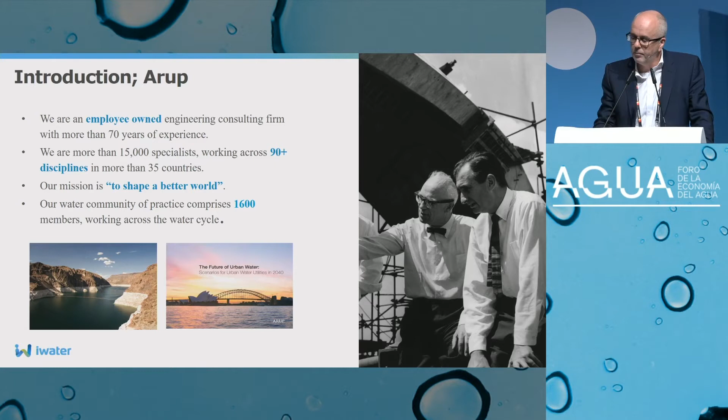And I just wanted to give a personal reflection. You just bear with me, but I think it's quite important. So back in March, I was fortunate enough to be at MIT in Boston. Within Arup, we run a master's class on urban resilience, and I was on that class. And we were being lectured by some very eminent urban planners and city designers as part of that course.

And as part of that, we were looking at the historic collapse of civilizations due to environmental constraints. And this really challenged me. So in Arizona, in the area where Phoenix now sits, back in 1300, the Hohokam had created this thriving populace of 80,000 people, a canal network over 500 miles, with over 100,000 acres of cropland. Between 1300 and 1400, that civilization collapsed.

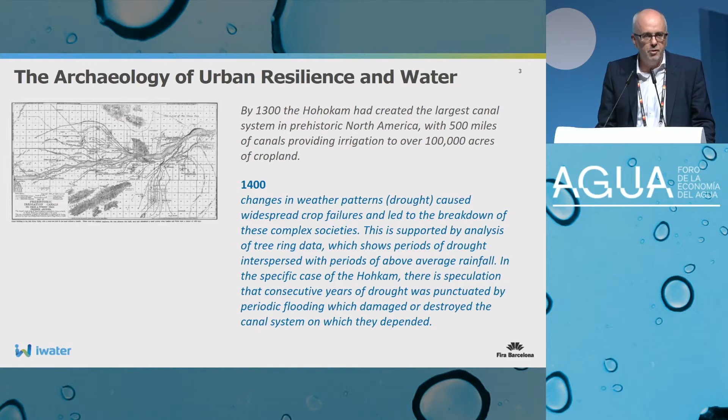And the archaeologists have looked at that in quite some detail, and that collapse they speculate is down to the presence of drought and intermittent flooding. So that was great, that was fascinating, I loved that. I went home and I logged on to the Guardian website, as I always do, and that's what I found. So some 700 years later, at the same location, we now have Phoenix struggling with water scarcity and some real issues around the sustainability of Phoenix as a city.

And for me, that brings up a number of thoughts. One, I think these challenges are real, and if our time frame's large enough, they are indeed very real. And two, I think compared to back in 1300, we have at least got some foresight of what we think may come. There may be some uncertainty around that, and I think it's incumbent upon us to act, to do so.

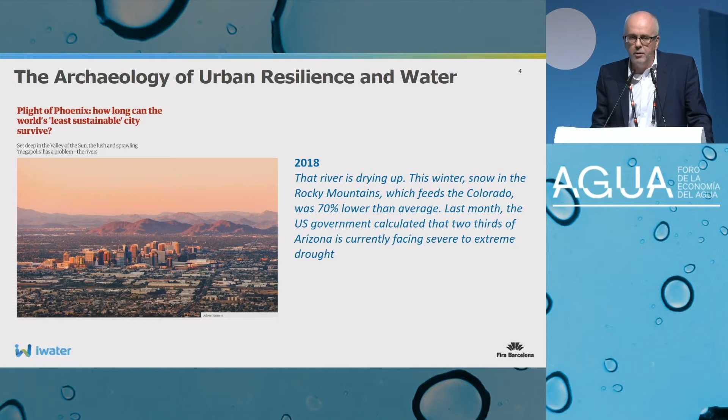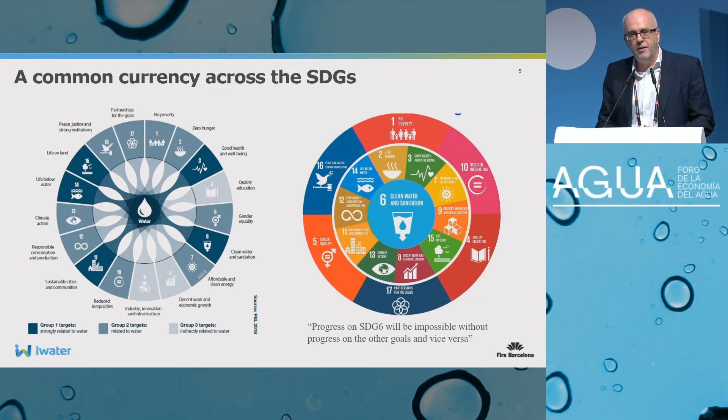And then if we look ahead to the future, I popped in earlier on and there was some discussion around whether water should be at the centre of the SDGs. I don't mind if it isn't, but fundamentally, if you read the synthesis report, it says progress on SDG 6 will be impossible without progress in the other goals and vice versa, so it can sit anywhere. And more importantly, I think that the high-level panel on water in their publication earlier this summer really drilled down to some of those key interlinkages. So if our future is the SDGs, we've got to understand water in that context.

So now I'm going to try something I haven't tried before. I'm going to take you through a publication we published this summer with the Ellen MacArthur Foundation on From Principles to Practices: First Steps Towards a Circular Built Environment. And that publication explores how a built environment will operate differently if we start to adopt circular principles. And Arup have tried to translate the circular economy principles that we often see in products and services into a built environment context. So that's great.

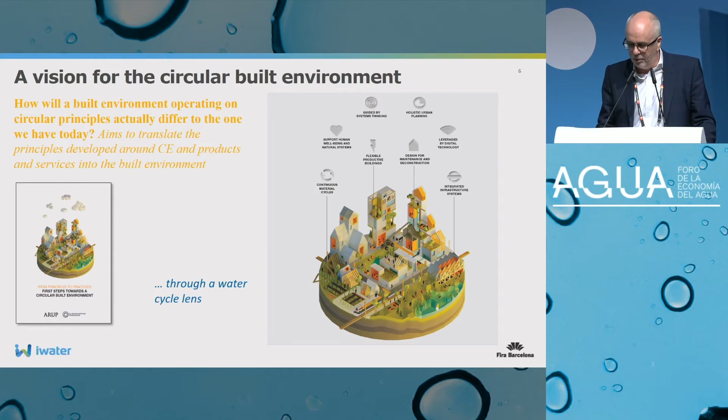What I'm going to try and do is then explore that through a water lens in terms of what water may mean to that circular built environment. So there are 8 key themes that come through that publication. So the first is supporting human well-being and natural systems. So when we start to think about water, we need to start to think about human-centered design, community engagement, co-creation.

Back in October last month, at the World Water Congress in Tokyo, we launched our Cities Alive publication, Water for People. That's the 5th in our series of publications, looking at global cities across the globe and understanding where blue interventions have made real impact. And there are a number of themes coming from that are shown here. And clearly, in terms of this first issue around supporting human well-being, putting people first is a key message coming from our review of cities.

In the bottom right-hand side there, you'll see a fairly complex diagram that hopefully you can read. So in the UK, we're working with Public Health England. We're starting to explore how can we get better health outcomes from infrastructure. So in the context of water, how can we get better health outcomes, whether it's from drainage and sanitation, whether it's from flood resilience projects, how can we get better health outcomes that benefit the city?

And we're starting off from the hypothesis that generally we start to think about health too late in our design process. So we're bringing, with Public Health England, health right into the forefront of our scheme and solution optioneering process and starting to think about shared assets and shared outcomes.

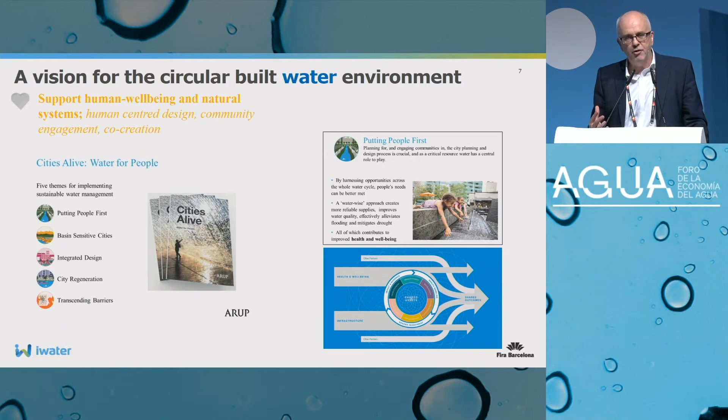That's work that's ongoing, but we're looking forward to working with health agencies in designing infrastructure. It's quite exciting. The second key theme is guided by a systems thinking approach, which we've already heard a lot of today.

And I want to use this prompt to talk about the work we've been doing with the Rockefeller Foundation, the Resilience Shift. So back in 2014, we set out with the Rockefeller Foundation to start to describe what city resilience looks like. What are the various characteristics of a city that might make one city more resilient than another? And on the back of that work, we developed the City Resilience Index, which is shown here, which started to tease out some of those key characteristics.

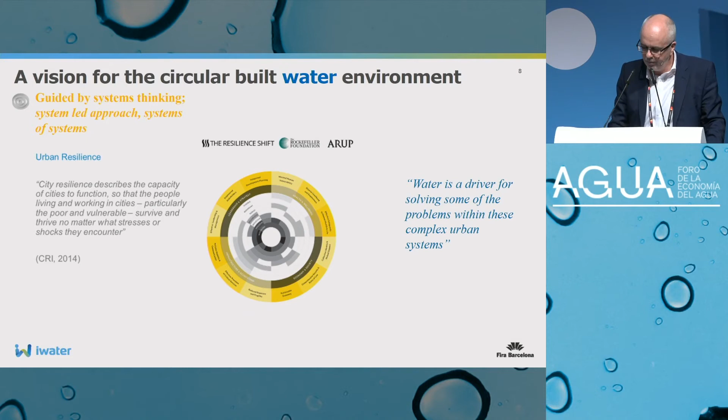The idea of these pilots is to go to the cities, do a deep dive around the water governance and management issues in those cities, and start to reframe that City Resilience Index into a city water resilience framework. So over the last 6 months, we've been working with Mexico City, with Miami, with Hull, with Amman and Cape Town, all of which have got some fairly key and significant water challenges.

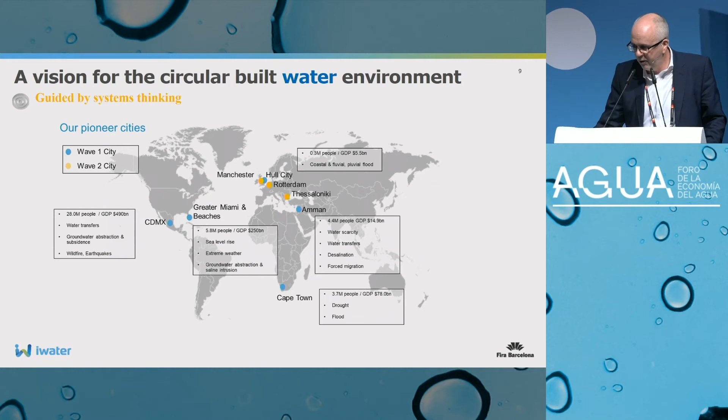If you listen to the representative from Miami speak, she talks about Miami being at sea level rise, subject to 15-foot storm surges, subject to flood inundation from inland flooding, and subject to saline ingress into their groundwater supplies. Some fairly major water problems they're trying to get to grips with. So that's been ongoing for the last 6 months. We've got some Wave 2 cities now that we're starting to work with.

And we've now started to take that thinking and build it into a city water resilience framework. It has links into the City Resilience Index, but it's subtly different in terms of understanding the role water plays around city resilience, looking at 4 dimensions: leadership and strategy, planning and finance, health and well-being, and infrastructure and ecosystems. And within those key dimensions, there are a number of goals. I can share more of this with you later if you're interested.

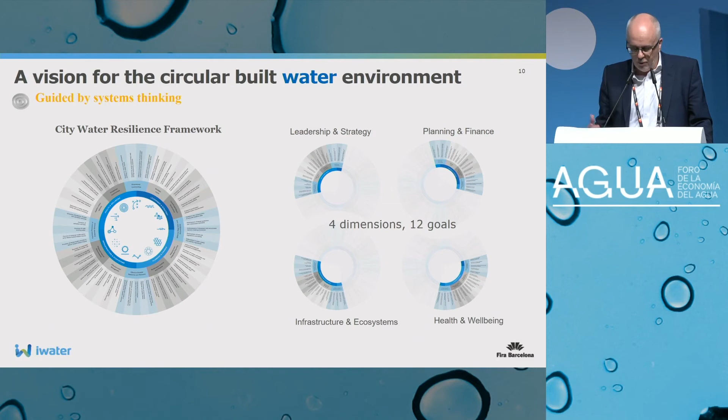The next key theme in terms of our practices document is leveraged by digital technology, and I'm sure you've heard a lot about digital today, and there are more eminent people than me to talk about blockchain and Internet of Things. But it is around accessible platforms, getting information out to citizens, enabling asset sharing and data across assets and new insights. And I wanted to share this bit of work, which I've been involved in.

It's quite exciting. So as we move to more resilient basins, in terms of protecting our cities from flooding, we're looking at new ways of slowing the flow up in catchments. And we're looking at interventions around natural flood management. So how can we make small interventions in the catchment that when they aggregate themselves are quite large in terms of the impact they have on the flood curve.

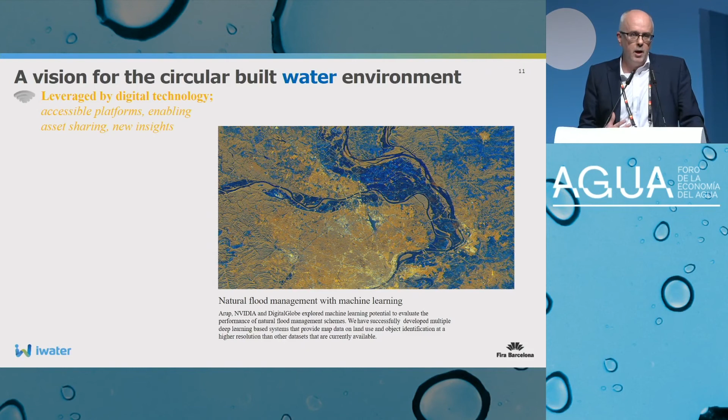So we've been using remote sensing and artificial intelligence to identify the preferred locations for the natural flood management, which is interesting and exciting. The more exciting thing is, as we then get to a new asset model, which might have hard grey assets in cities and very dispersed natural assets in the catchments, how can we start to manage those as an asset base? And how can we use remote sensing and machine learning to allow us to manage those assets more intelligently?

The next key theme is holistic urban planning. This lies at the heart of what Arup does. Arup's involved in cities in all aspects. Designing for resilience, water as a catalyst, blue-green. You've probably heard a lot about this already this week.

Top right-hand corner, this is Bradford. Anyone been to Bradford? One. So Bradford is quite a deprived community. It's got a number of challenges in terms of its economic development. Water was at the heart of regenerating the centre of that city.

And the spin-off impacts around water in the city centre have been very marked and visible. Bottom right, working in New York, so trying to retrofit these solutions into an urban environment to try and mitigate the impact of storm overflows on the Hudson River.

And the main photograph is of Leeds. I know Gonzalez knows Leeds. This is a really interesting project for us. This was a project that was being led by the Environment Agency in the UK. It had another consultant on board, not Arup, that was looking at the solution to manage flood risk in the city. That consultant was recommending that the city put in walls that were about 1.5 meters high through the center of the city.

Technically, it worked, but it separated the city from the river entirely, and the whole public experience of the citizen in that city walking next to the river would have been lost. So Arup invested its own money and time in coming up with an alternative solution, which, as of last year, was built and is now installed. We put in a flexible weir, so under most circumstances, that weir stays as is. When the flood comes down, the weir drops, and the hydraulic curve through the rest of the city lowers, and our walls are only 0.5 meter high, not 1.5 meters high.

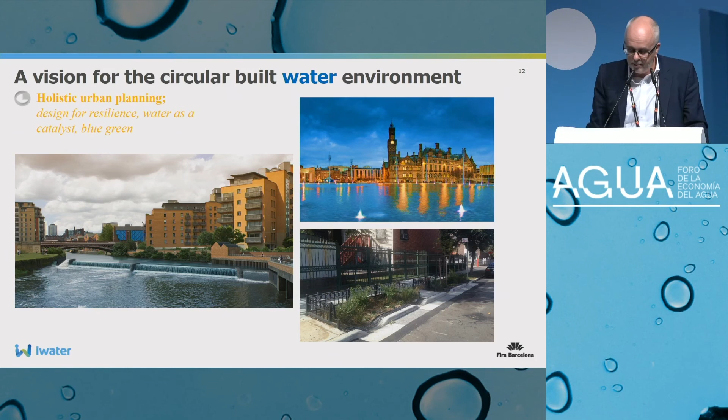I've been told I've got a minute left, so I'll quickly run through these.

So the next bit of work I wanted to share with you around continuous material cycles is the work, again, we're doing with the Ellen MacArthur Foundation and others on the water and the circular economy. So teasing out some key principles. The first principle being designing out waste externality. So how can we optimize water in catchments? And here I'm thinking about how we think about non-consumptive water use in catchments, how we think about water that's lost in terms of discharge to saline environments in catchments. And we explored this in some detail in our work with 2030 WRG, and I'd commend that to you.

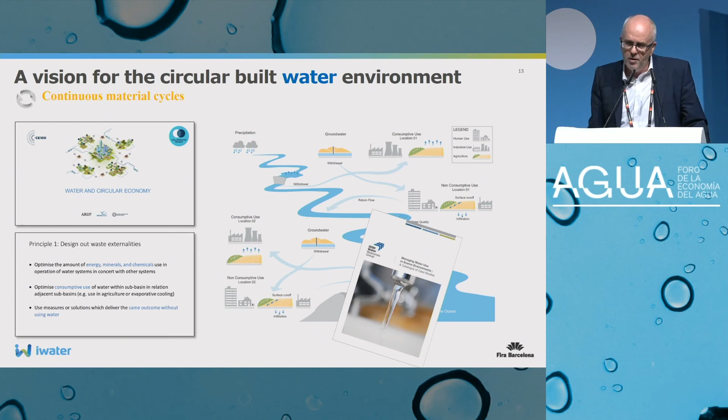It's worth looking at. The second key principle is keeping resources in use, and this is perhaps what we are more familiar with in terms of the circular economy. It's starting to think about how we can optimize resource recovery in the water system. And again, we're doing some work in the UK with a water utility, starting to think about resource farming and land use planning for resource farming around wastewater treatment works. In Australia, we've been involved in sewer mining projects, or actually mining the sewers for wastewater for reuse.

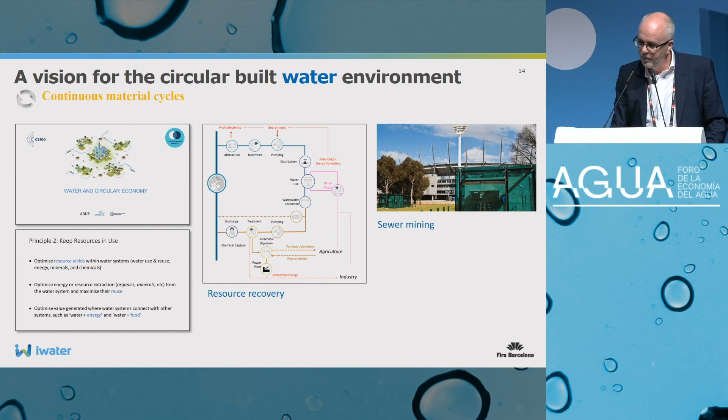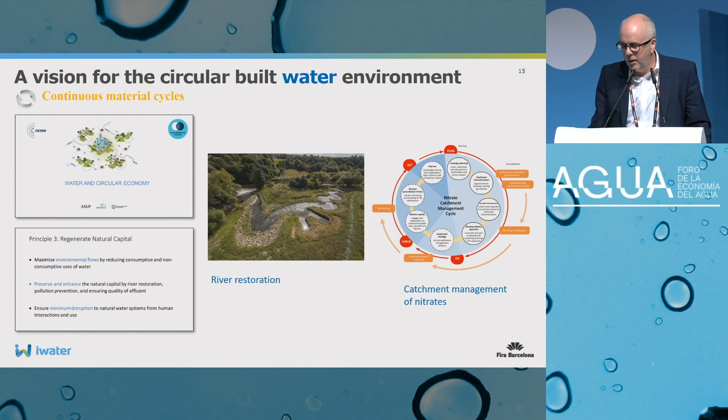And the third key principle is around regenerating natural capital, making sure we maintain those environmental flows in the catchments and we preserve and enhance the natural environment through maintaining fish passage, or increasingly through starting to think how we manage nutrients at source in the catchments. And there are some really interesting models around the world in terms of water funds associated with nutrients.

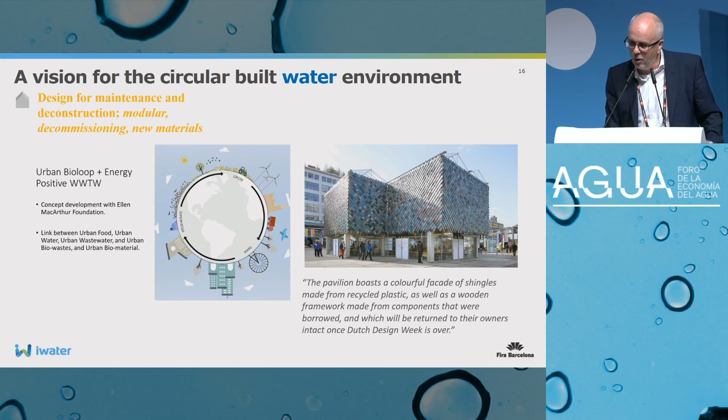Almost there. The next key theme is around designing for maintenance and deconstruction. I won't talk about the pavilion, I put it there because I like that image and it's an interesting story. But starting to think about how we can use new materials in our water cycle systems, biomaterials, how we can use those resources to generate biomaterials, this whole idea of the urban bioloop. And then thinking about flexible and productive buildings where we harvest rainwater and reuse stormwater.

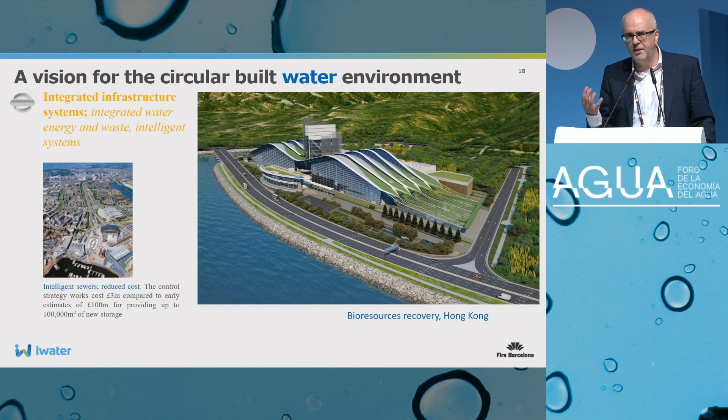And then thinking fully about our integrated infrastructure systems, integrating water, energy and waste. And thinking about intelligent systems. So the image on the bottom left there is some work we've been doing in the UK on intelligent sewers. So using the sewers intelligently to capture and store water to save capital works on storage.

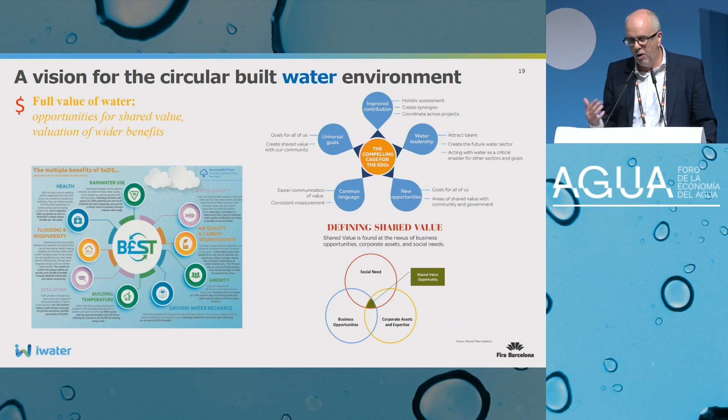And lastly, starting to think about the full value of water. I've put this one in. It wasn't our original work for Ellen MacArthur, but I think this is imperative around creating opportunities to think about water and resilience in a different way. And this whole idea of shared value, I think, is quite interesting.

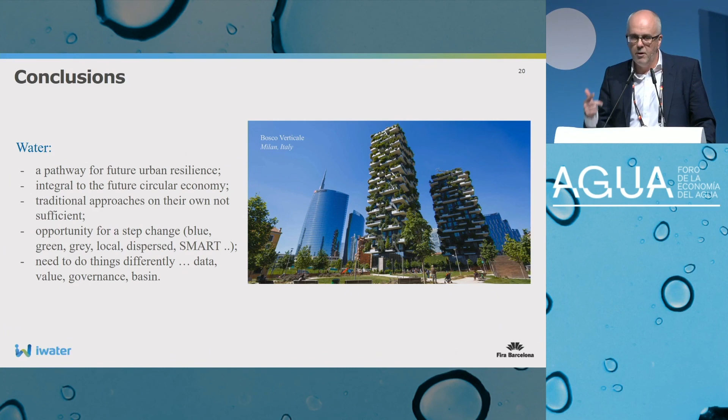So to conclude, I think a lot of the messages we heard before, water provides a pathway for future urban resilience. Water is integral to a future circular economy within the built environment. Traditional approaches on their own will not be sufficient, and this opportunity for step change, whether it's green, blue, dispersed, local, smart. And finally, I think we've already heard today from the previous speakers, the need to do things differently, and these messages are taken from the high-level panel on water around better data, around understanding value, around better governance, and around thinking basin-wide. Thank you.